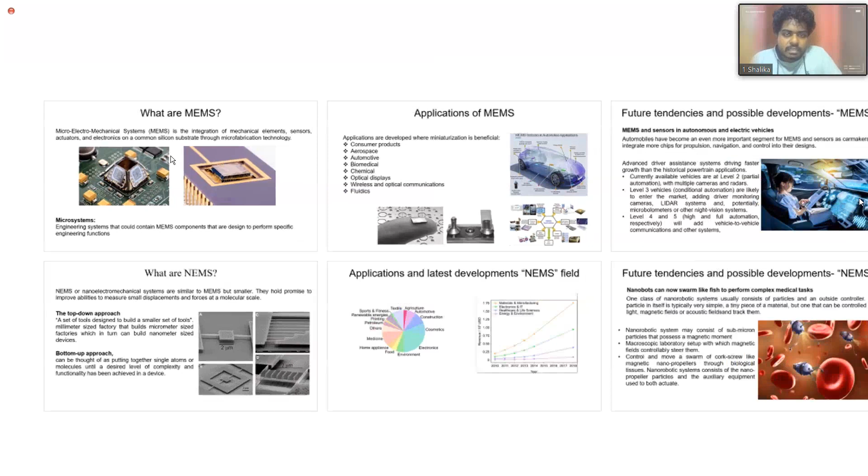So let's move to what are the MEMS. I think we are familiar now with this, so I also added some definitions. Micro electromechanical systems, MEMS, is the integration of mechanical elements, sensors, actuators, and electronics on a common silicon substrate through microfabrication technology. And a microsystem is an engineering system that could contain MEMS components.

I think we are familiar with these images, and you can see how small they are. I also added a very nice clarification that MEMS can actually do four things. Sense means movement, vibration, pressure, and those things. Think means collect information, analyze data, interpret data. Communicate means send information, provide outputs. And act means respond to changes. All of these things are done in MEMS applications.

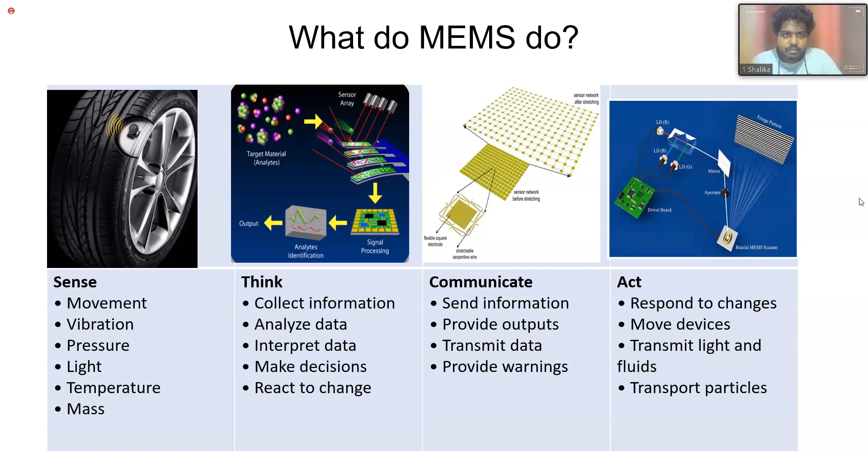So let's move to the types of devices. Actually, we experience these things in daily drives and also special things like pressure sensors, accelerometers, micro mirrors, and gear trains. These things actually we see in our day-to-day life and in a lot of applications.

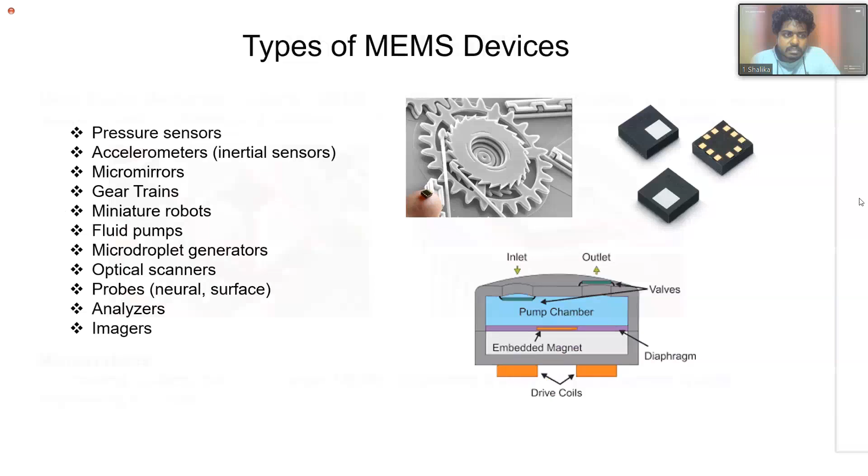So let's move to the applications of MEMS. When we move to the applications of MEMS, there are a lot of consumer products, aerospace — this was used in aerospace and also very technical, futuristic things developed in that — automotive, biomedical, chemicals, and optical displays. These are things we are developing with MEMS.

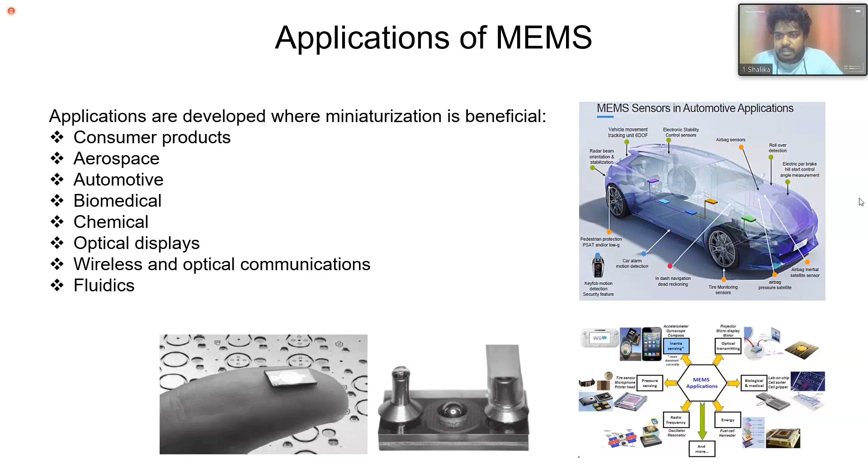You can see in the first image how it is compatible with the vehicle. We all have even bikes also, and that will be in future too. Nowadays there are a lot of options with these things, and all of them are very compatible and very reliable. Driving systems, safety systems, all are developed with these things.

The main thing is, you all experience that heart patients in daily life face a lot of risk, because they cannot guarantee when they will be ill anywhere. But with this element that communicates all of the things, it means the physicians are connected with our people.

If I am a patient, I can also monitor my heart, and if there is a dangerous situation, we can go to the hospital, and the physician will also know. So it will be a very good thing. And these are also the applications.

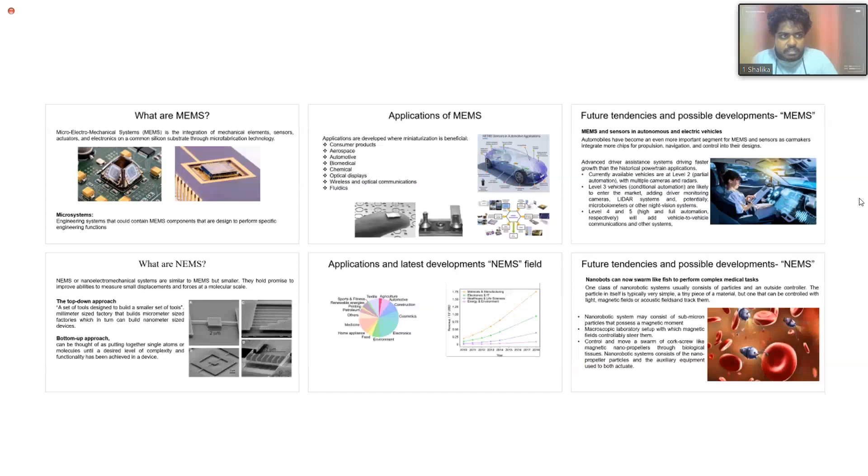So for future trends, I added this one very nice point — in the future, autonomous and electrical vehicle fields will be a very good area, because we have to think about our fuel and energy saving, since nowadays conventional methods are day by day expiring, because in future we are facing the huge impact of loss of energy, as all the fuel is being lost.

So for that we have to go electric. I don't know, electric is also generated with fuel. So at that time we have to think about saving our energy. For that, MEMS does a very great job, because at the MEMS level, a lot of energy saving is possible and it's very compatible.

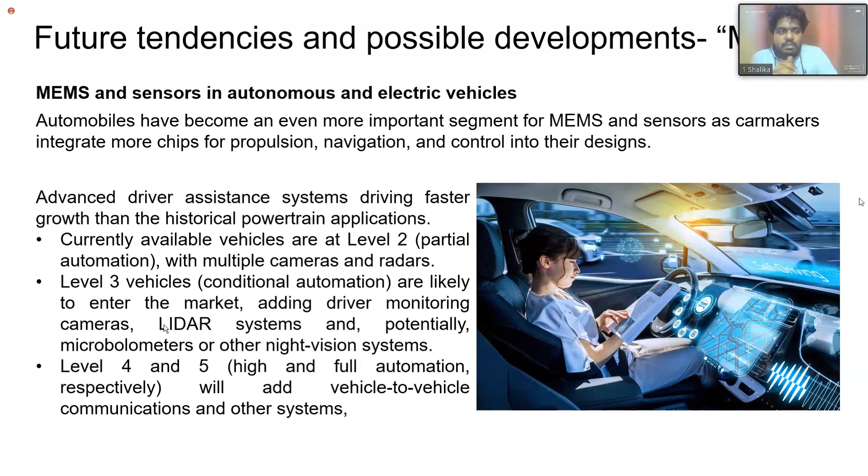So what are NEMS? NEMS, or nanoelectromechanical systems, are similar to MEMS but smaller. They hold promise to improve our ability to measure small displacements and forces at the molecular scale.

There are two approaches: top-down and bottom-up. In the top-down approach, a set of tools is designed to build smaller tools, at millimeter size. For example, a millimeter-size factory builds micro-size factories, which in turn can build nanometer-size devices. The bottom-up approach involves putting together single atoms or molecules at the desired level of complexity, and functionality is created in the device.

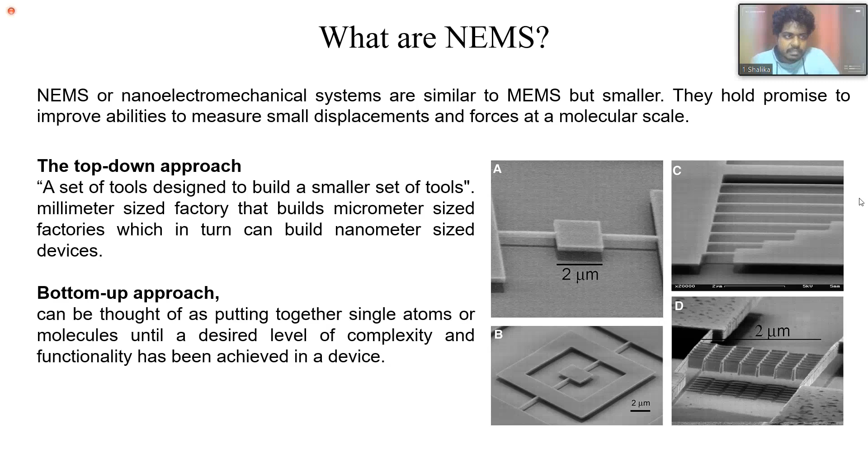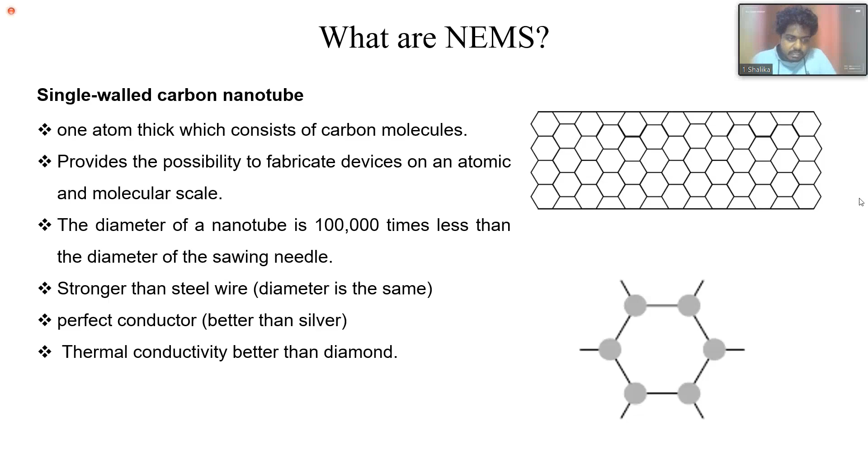Here's a pictorial representation of the scale, so you can get a picture in your mind of how small it is and how it compares.

We should learn about these nano things, and we should invest in them so we can survive. Otherwise, going with conventional methods, I don't think we can survive in the next 10 or 15 years.

The most relevant example is what we've all experienced in the agriculture sector in Sri Lanka nowadays. We faced a huge situation, but the solution was nano urea. Normally, fertilizers added to the soil are not very efficient and harm people's health. But at the nano scale, it's applied on the leaves and absorbed by the tree. That's a very good and practical example.

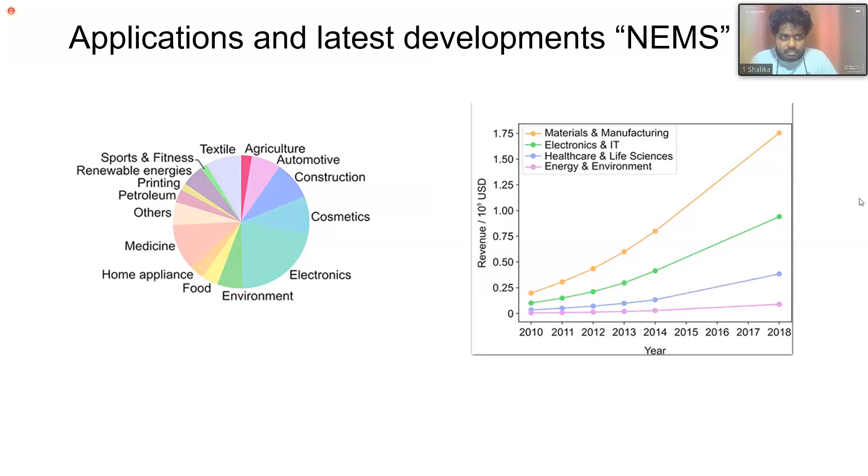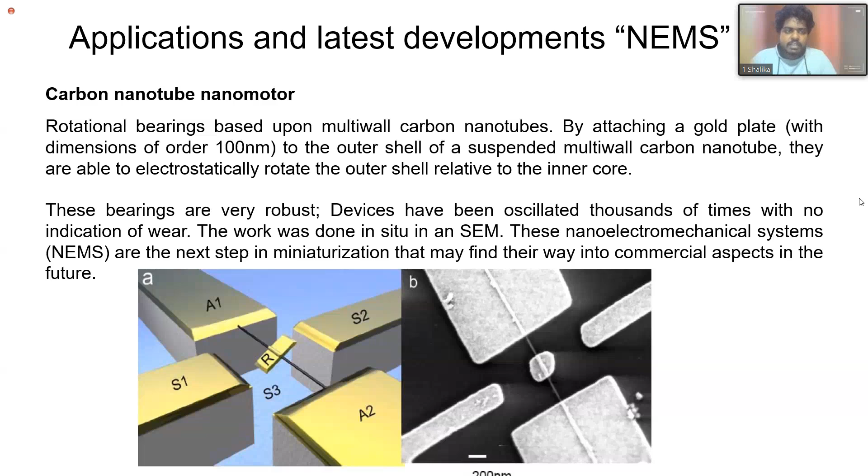In the future, some people have gadgets in their hearts with limited batteries, but these things will save our lives, and the medical sector will be improved.

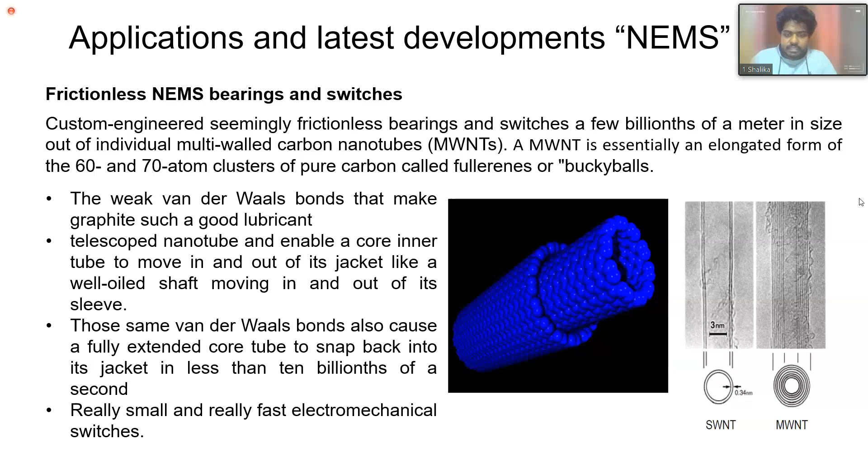The final section is future indices and possible developments. I chose this section, while my colleagues chose many other sections, to match the current situation - we all face the corona situation.

In situations like corona, in the future we can use nano robots and nanobots. A vaccine is some kind of antibiotic, but in the future we can do it with robots and electronic things. We can program it - physicians will be programmers - so in future we will save our lives at the next level.